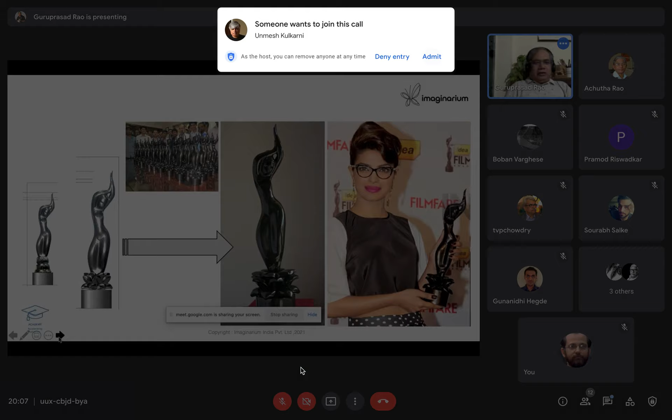That's all. And so here goes the sensational Black Lady. This we created very proudly for worldwide media and the Filmfare people. And the base of the Black Lady was redesigned to be a blossoming lotus. And you can see the lotus there. And this is a very unique piece because only the 59th Filmfare Trophy has this, and they're all very light. The year was 2013, the 59th Filmfare Trophy. And they were all made at Imaginarium by 3D printing.

And so the whole Bollywood, Hollywood, and everywhere, people were trying to consider 3D printing as a great something fallen from the sky, that kind of feeling. So it had such a sensation creation quotient once upon a time. And of course, we went to various fashion shows because fashion shows also draw a lot of crowds. We went to the first Asian 3D printing fashion show.

Can I request somebody to mute there?

Okay, it was disturbing. The first Asian 3D print fashion show that happened in Kuala Lumpur also gave an ample window to the world as to what all one can do in the world of fashion. And I designed this peacock headgear, and it was one of the few designs selected all over the world, showcased at Kuala Lumpur. And likewise, there were many.

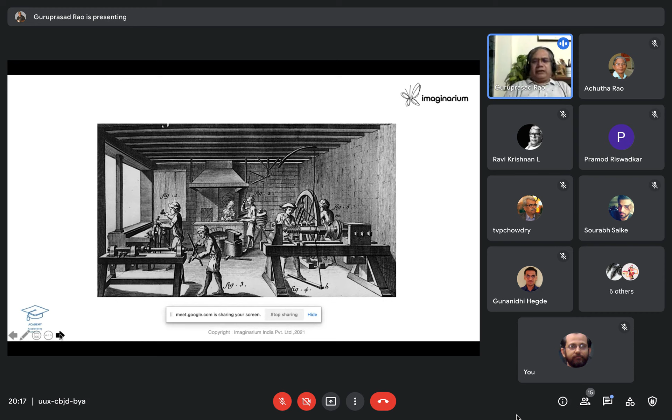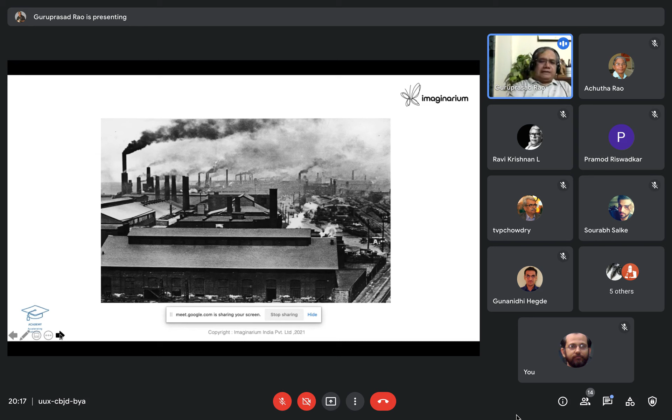But mechanization helped man to actually put a lot of energy into whatever they are doing. So mechanical advantage was actually made use of, and soon it led to steam power and all, and this, we all know, led to the industrial revolution. This is a typical industrial revolution picture. Bombay city was also looking like this, with all the mills around, and this is Ford's assembly line.

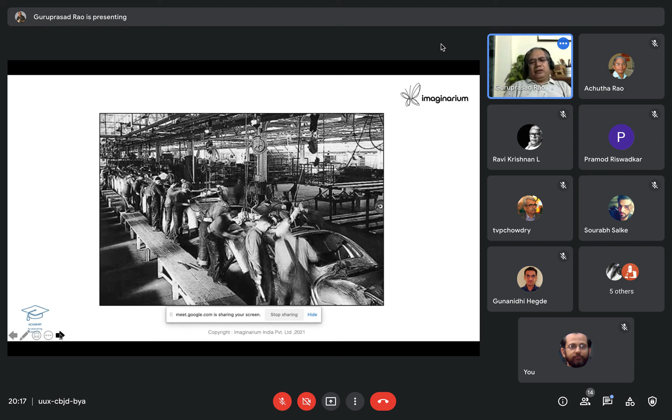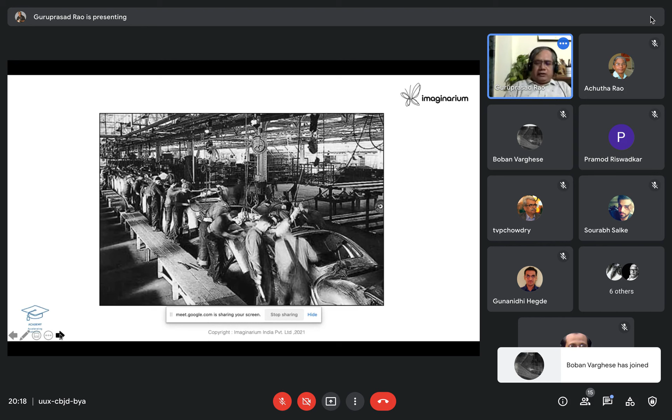This looks like a tabela, what you call a cow shed. On one side the chassis used to enter, and on the other side it used to leave, with all the things put. Division of labor, production line and all were born at that time. But soon, with the advent of radio valves and miniaturization of electronics, the whole thing changed, to have some kind of automation.

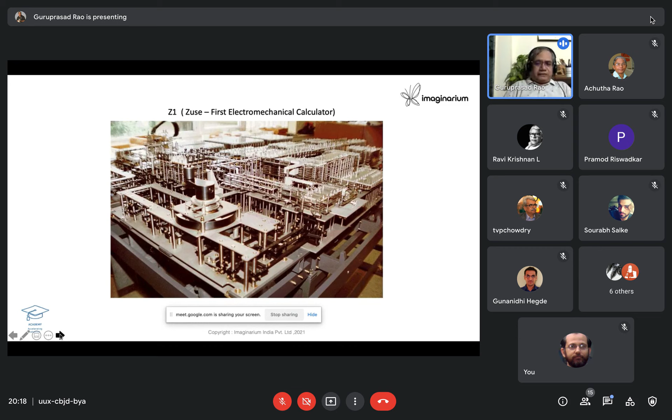So what you're seeing is the electromechanical calculator, but I think this is the last of its kind. Soon, transistors, miniaturization of electronics, all that started. The computing age started, and whatever we saw so far, we can call production technology, the art of making things. So the art of making things, in modern terms, we call production technology.

And when we speak about production technology, there are only three ways anything can be made. You can make it or break it, and put it back. They say you cut it, break it, or glue it, or something like that. So, subtractive, and joining is by gluing, or you can just transform or form it, bend it. So, formative.

In fact, today's topic, 3D printing, is a subset of one particular pillar, that is additive processes. Many people also call 3D printing additive manufacturing, though I'm not very happy with that, because manufacturing for me is a very loaded term. Manufacturing means making millions. We'll come back to that point. So if you take plus processes, casting, welding, cladding, painting, plating, gluing, lamination, coating, and 3D printing, these are all part of additive processes.

What are zero processes? You neither add nor you subtract. Bending, extrusion, drawing, forming, forging, coining, rolling, knurling, embossing. They're all zero processes or forming processes.

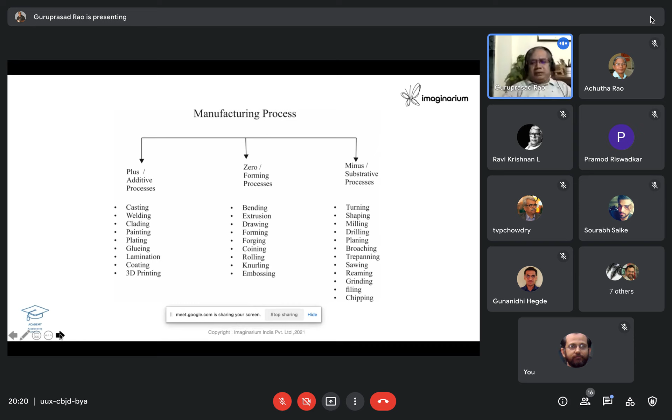Then we have subtractive processes, like turning, shaping, milling, drilling, planing, broaching, trepanning, sawing, reaming, grinding, filing, chipping, and many more. So it is like, you have a stone, you're chipping out to bring out a shape. That is all subtractive, but that is very wasteful.

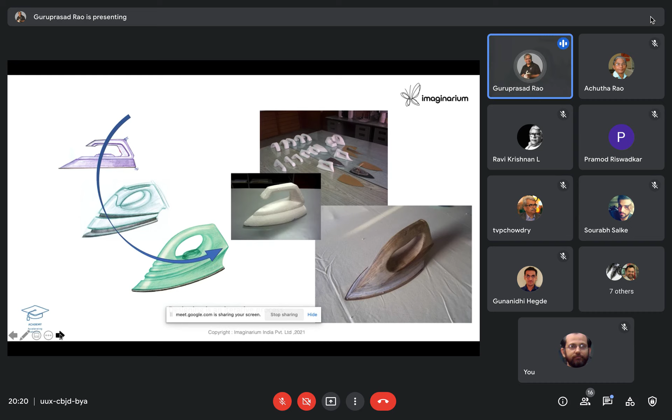We'll see how. And in fact, with all these processes, people are able to shape their ideas to make products, what we all use today. I'll not go into the details of the design process, but just to say, world over, people have been going through a systematic innovation process; recently we started calling it design thinking also.

And many times when you have an ideation and you go for detailing the nuts and bolts of design, you have to always test it. And many times we say, why does a design have to be tested? You just do it. Because there is a possibility the design may fail, correct? And so that's where prototyping becomes a very important aspect of production and design.

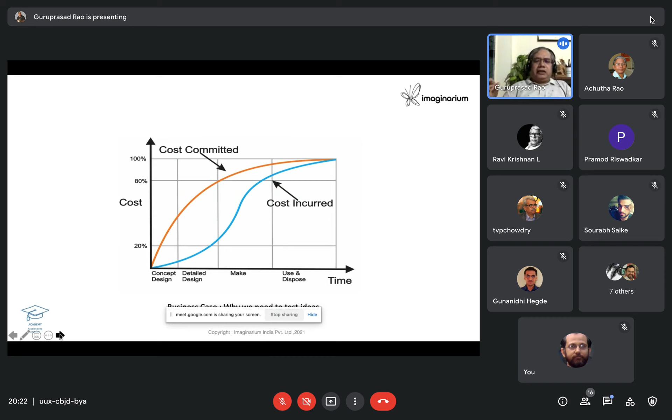And that's because there is a business case. What is the business case? The cost committed curve to cost incurred curve. In concept design and detailed design, you're not incurring as much cost as you do when you make it or use and dispose. A lot of cost is committed, but cost incurred is less during the concept and detailing stage. So people want to test here, when the cost is less, so that they can de-risk the whole process of product development. That forms the business case.

Why is that? Because if you have an idea, I can improve on it. And if I have an idea, you can improve on it. That is the beauty of the human mind. It can add and synthesize and bring out something new. So if your design fails in the marketplace, who benefits? It is the competitor. The competitor will improve upon it. So it is better to fail in your own idea kitchen, your own idea foundry, or in your own R&D.

So world over, people keep on testing and refining their ideas, and if they think at some stage it is done, they keep it as version 1, and the R&D people keep on working on it, so they get version 2, version 3, version 4. Of course, not only in India, all over the world, copyright is the right to copy. Litigation is very expensive and difficult, particularly in India. So instead of going for litigation, people should try to maintain a leadership in their design.

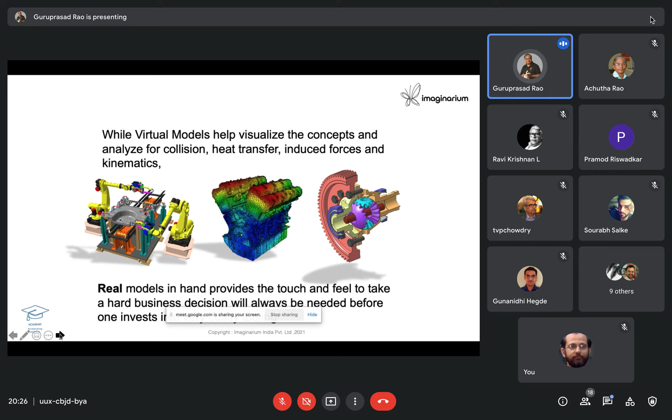So this remained, and at this point of time, people started looking at this particular aspect, how to make prototypes faster, quicker, and digitization of manufacturing was also happening very rapidly. The computer technology helped us to create all these virtual objects, and somebody was looking at it, called Chuck Hull and Dr. Kodama and various others. They were looking at how we can make a prototype quickly.

And so a new term was born. It was called rapid prototype. Rapid prototype is a word given by Dr. Kodama actually. It stayed almost till 2000, 2005. The technology was called rapid prototyping only. No other name.

And so you can see the world in the third industrial revolution, we have this 3D printing born in the year 1986. So in '83 it was invented. It took 3 years to get the patent. Charles Hull, Chuck Hull we call him, is still there as emeritus CTO of 3D Systems. And he invented the first 3D printing technology called stereolithography, or photopolymerization.

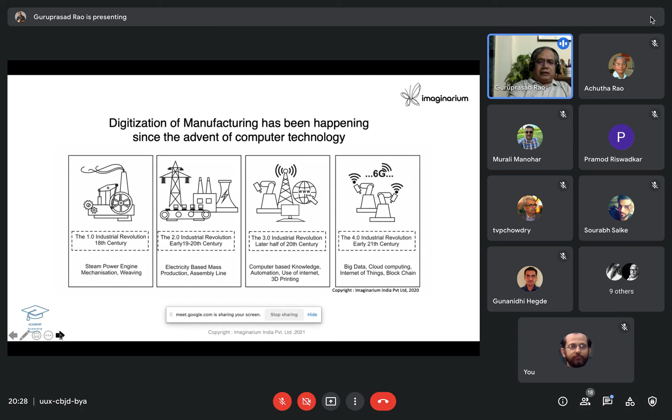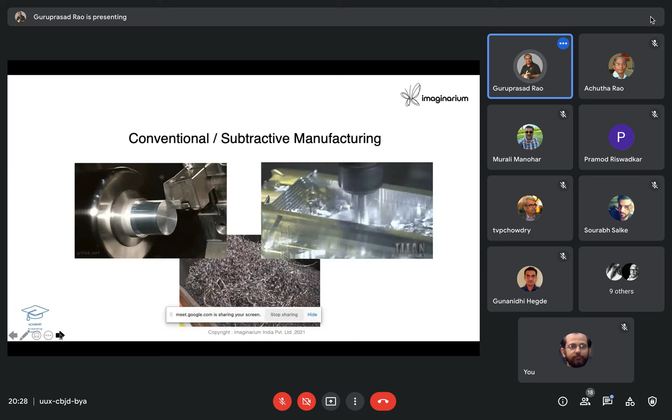And now we are actually at the cusp of the fourth industrial revolution. We call it Industry 4.0, where a lot of things are going to come and further disrupt the world of manufacturing itself. We all know conventional subtractive manufacturing is very wasteful because it generates a lot of chips you cannot eat. It requires a lot of energy. And so a new way of making things was born, and this new way is to directly create a part from the CAD. There is no intermediary.

So we are talking about a technology we can call art to part, or CAD to part, where you can get faithful reproduction of your virtual entity into a physical object which you can hold in hand and explore. In fact, this has helped a lot of new developments in product design and quicker explorations. And the cost of prototyping itself has come down largely.

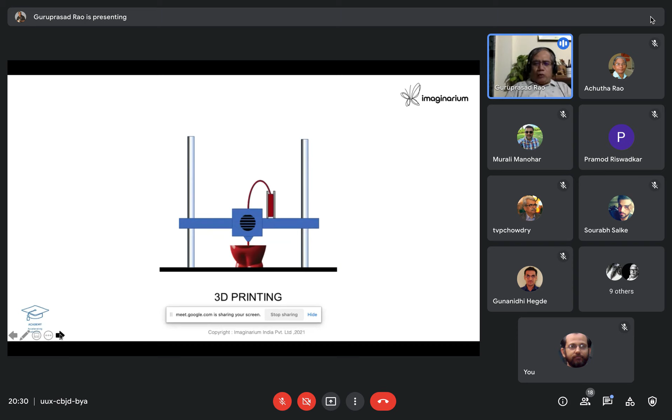If you look at the transformation here, the idea to sketch is converted to a virtual model, then it is sliced using software, and the slices are put back in a sequence in order to get the object back. In a simple way, we can say a 3D printer is a robot which will convert your virtual object into a physical entity. You can also do all these transformations.

Many times we think 3D printing is just one thing, but it is not. Many people say 3D printing uses fiber or filament. Some people say, no, I've seen some place it uses liquid. Some say they have seen another place that uses powder. They're all right, because you have various technologies today. They all do the same thing, but they're called differently. Collectively, the whole group of technologies is called 3D printing.

So you can have SLA, SLS, FDM, LOM, binder jetting, material jetting. There is one more called DED, and it goes on. In fact, ASTM had to intervene and say, don't call it by 30 different names, let us have 7. So they clustered it. So 3D printing by definition refers to a set of technologies, not one, which help to fabricate 3D objects layer upon layer from digital input data.

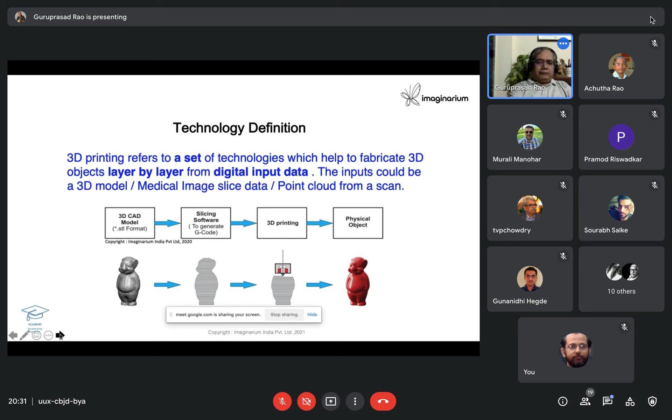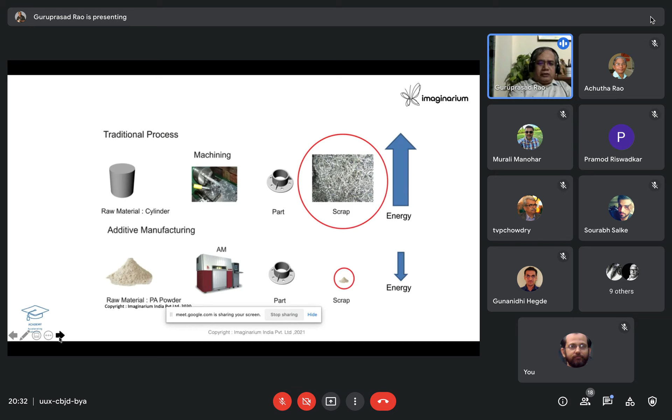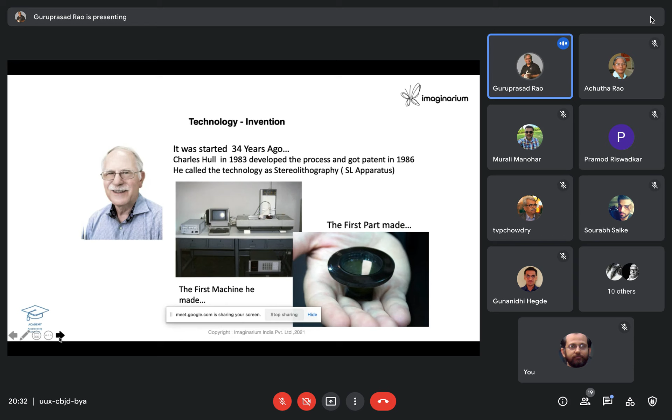And if you very closely look at the part, there could be some problems, but I'm just representatively showing it. And these are the pioneers. We talked about them. And this is the first technology, the first part made, and the humble machine which was done a long time ago, looking like that. But today, modern machines look like this.

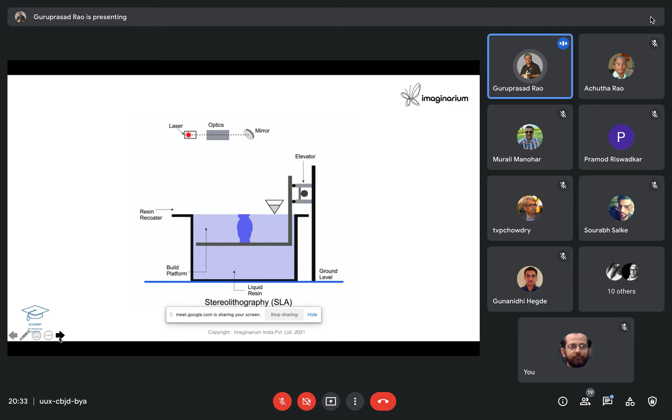So let us see a kind of animation wherein you can see the laser comes from the top. The virtual object is sliced, and every time a 2D image is done and it is scanned, and that becomes polymerized. So monomer becomes a polymer with the impingement of high energy laser, and that's how the liquid becomes a crystalline solid, and that process continues. And after the part is made, it is ejected out. And you can see how the part is getting ejected out here.

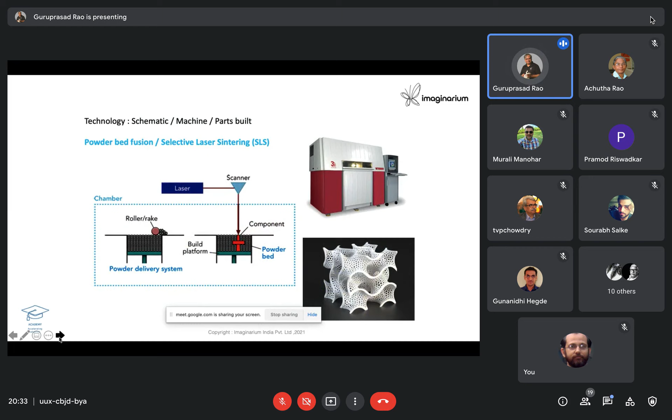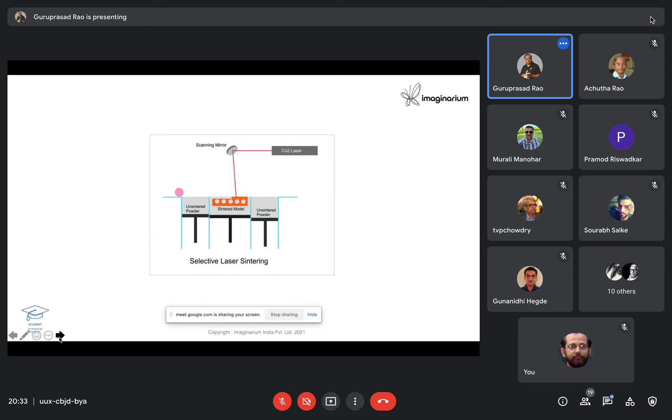And next technology is powder bed fusion or selective laser sintering. So in this also there is an animation. Maybe I'll go to the next animation. The powder is spread evenly and the laser comes, so instead of liquid, here we use powder. And you can see how the powder particles get bound to each other. This laser is a CO2 laser. It has got a Gaussian distribution of energy. That means it not only binds the two particles in the same level, but also it penetrates inside and stitches it to the layer below. And that's how the part is made.

And you can see here, this is how the machine looks like. You can see a phantom writing concentric circles on the left hand side. That is actually the CO2 laser. When it is sintered, you can see it becomes a sheet of nylon. It's a nylon powder. And the process goes on and on. You get concentric cylinders. And this is called cake. When the cake is ejected out and you are going to extricate these objects, they are like archaeological excavations. You have to take out the pieces by blowing away the extra nylon powder, so that wherever the sintering has happened, the powder are bound, and they make a solid.

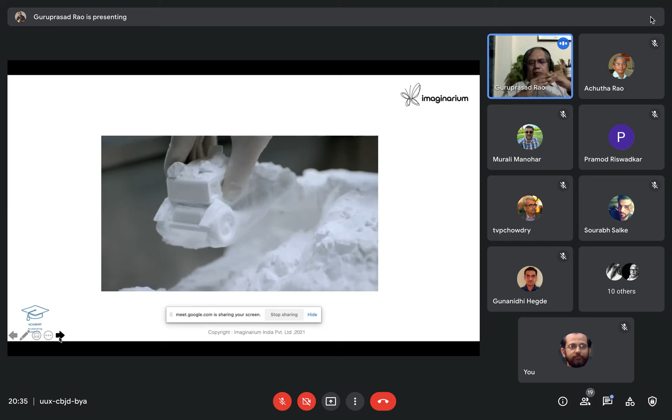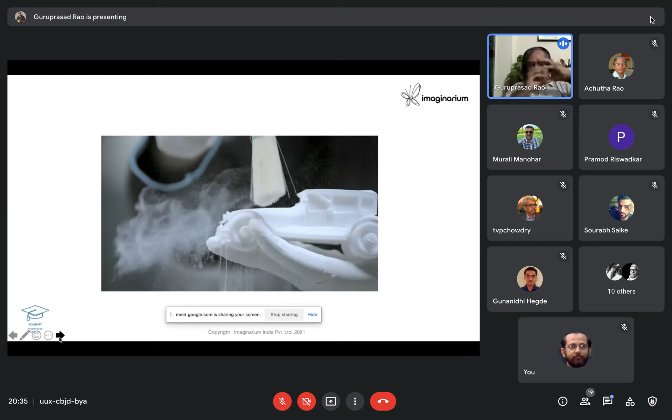And because of which, I can make chains, I can make objects that are linked together, without any difficulty. So I can actually have an assembled part. Because it's powder, after all, if I make a small clearance, I can blow it away and still get them. I keep saying one thing: in CAD, there is no gravity. So in CAD, you can keep something floating. After you fire it to 3D printing, they get assembled. So only after you take it out of this cake, the part will fall down because of gravity, and you have a link which is going to form.

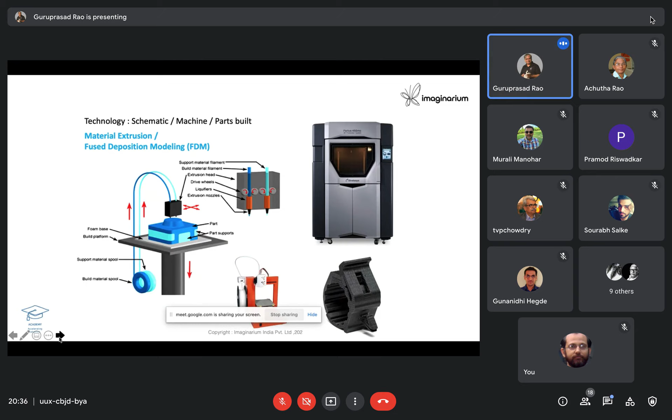And of course, you have material extrusion, fused deposition modeling, what we call. And this technology is wonderful, and in fact, it became an open source technology because of the patent expiry. And also there was a project called RepRap. We'll see that. This is a MakerBot printing something.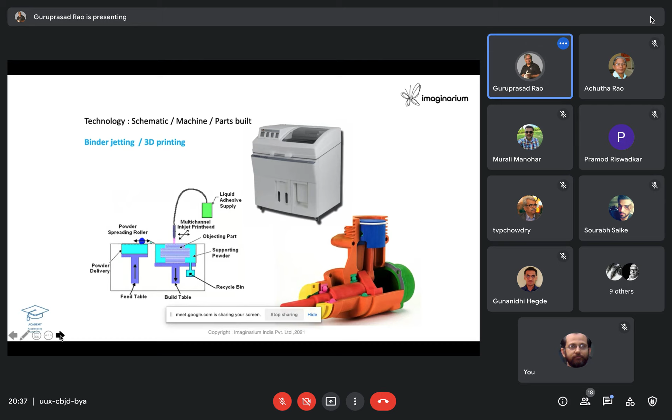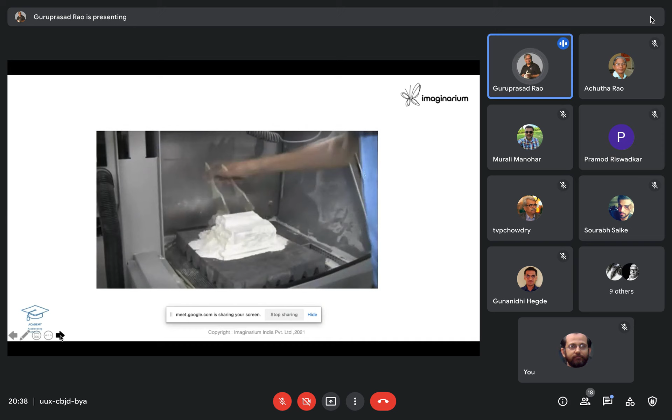And you can see a demo of this, wherein a whole home is built. When it starts, it looks like a normal house plan, and you complete the build, then vacuum all the powder out. And because it is bound by adhesive, it is not very strong. It cannot stand high temperatures. So there is no industrial application of this, and so it's not very popular.

This is an Israeli technology called material jetting, PolyJet or MultiJet, what we call. What you see here is a floating manifold, like it is in zero gravity. It has got a hard white manifold. It has got an O-ring which is very, very soft. It has got an actuator below, which is hard inside, soft outside. So the whole thing is printed together.

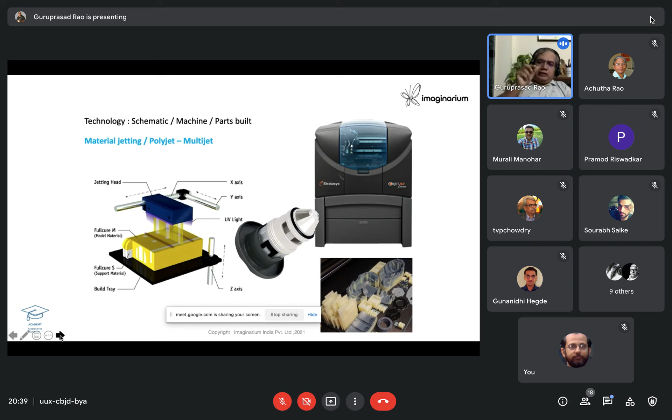How is it? Here they have a tank A and B. They mix at various proportions, at various voxel level. What is a voxel? Voxel is a 3D pixel. A 3D pixel is called a voxel, and you are able to deposit that. So you can build something from transparent to opaque, or hard to soft, or a combination of all this. So this is called a digital material, wherein they can play around with the property at the voxel level. A voxel is a very small cuboid unit one can consider.

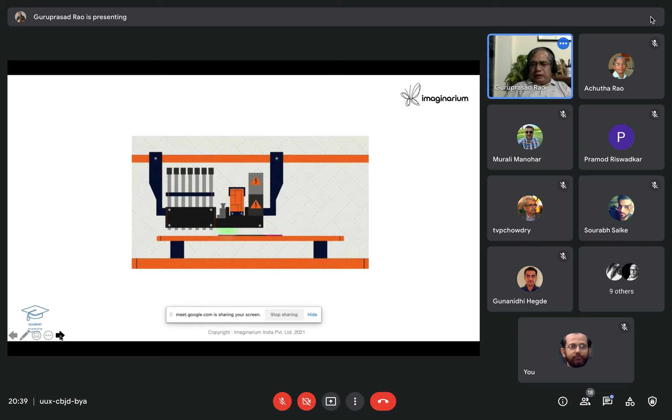And you can see here, it is like paste. When a paste is applied, what is the consistency? Soon the paste gets hardened because of the exposure to UV light. And here again, this is a photosensitive material. So it gets hardened, rock hardened, with, you can see, a green color. That is a UV light.

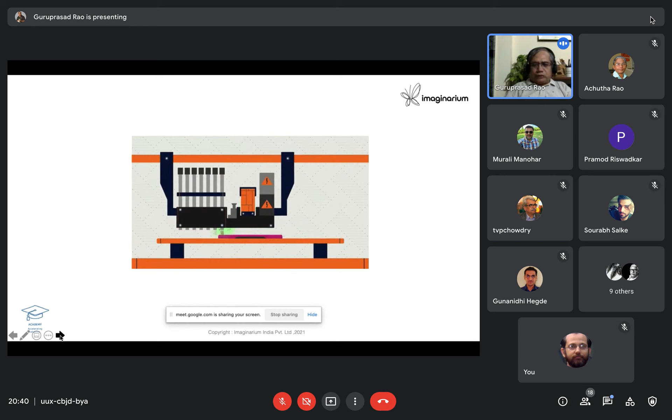And of course, people are also doing a lot of metal nowadays. Metal 3D printing actually goes back more than 100 years, they say. Why? Because they were able to use a welding torch and deposit beads of metal. And they actually demonstrated technologies to show it can make vessels or vases and things like that. That is in 1925, in the early 1900s also. People have shown. So people say metal additive is actually more than 100 years old. Well, this technology had to mature itself, and now we have a lot of such things entering the market, and they're still very expensive. We'll come to that when we take up questions and answers.

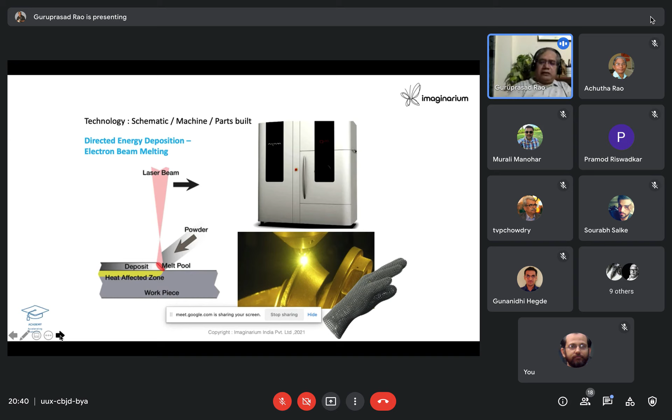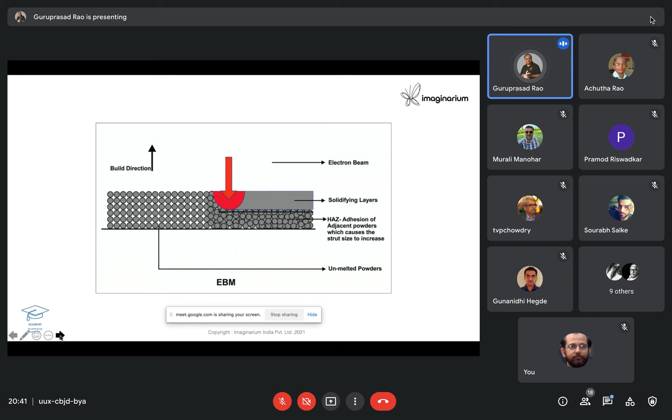And you can see here the melt pool. The metal powder, much like the nylon, also gets fused. But here actually melting happens, and ultimately the whole thing is like a foundry. It's a mini foundry. You can see how a powder bed is getting sintered. This is a powder bed. And metal being very fine powder, it can melt easily at a much lower temperature. So they are able to take it to the melting level in a very small area with lasers or plasma, or it can be done with wire and plasma also.

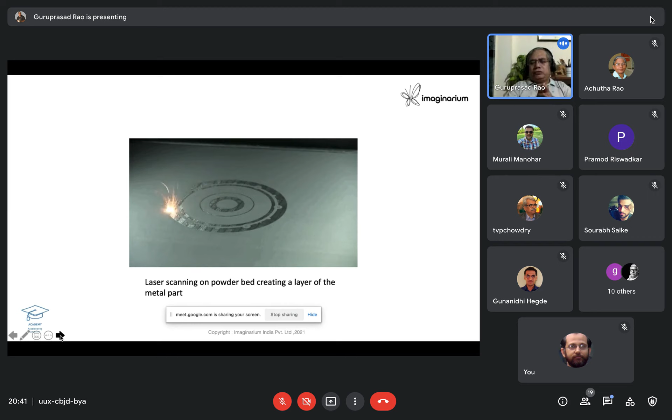So a lot of technologies are coming nowadays, and this is yet another technology wherein a wire enters in the middle. Then they're going to have a drop of metal falling. It's called drop on demand. This will transform the industrial world to adopt 3D printing, especially in metal, because every CNC can be converted into a metal-enabled machine in a short time with a small console. And also one can do hybrid manufacturing, that is, after having done the deposition they can also machine it in the same setup. So such things are also coming.

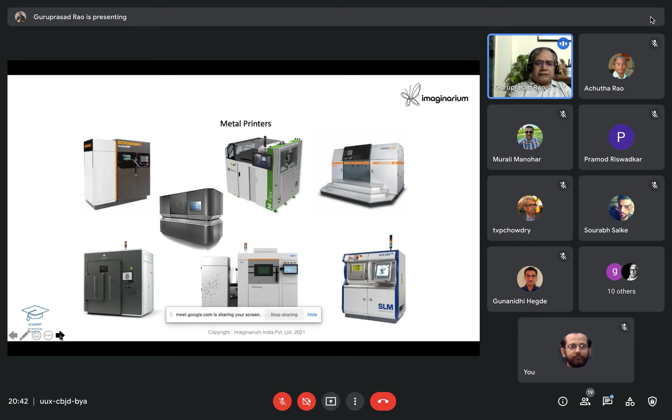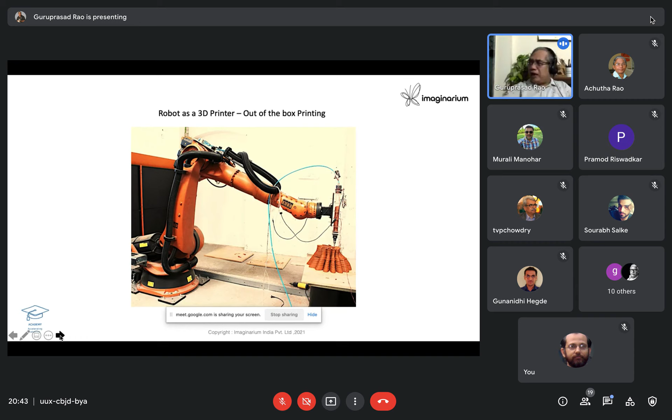So these are some of the metal printers you can see. They come in all shapes and sizes. And of course this is a KUKA robot. People have been using robots to deposit things. And many times people tell me that these cannot be called 3D printers. By definition they are 3D printers, because it doesn't matter what they deposit. In fact they can print all around. After depositing in one place they can go all around. And particularly wherever you have high demand, like food printing, such robots will do a good job.

So this is called a 3D doodler. It works on the principle of FDM, fused deposition modeling. But many times when I ask people, is it a 3D printer, the students will say, yes, this is a 3D printer, it's FDM. It looks like that, but it is not a 3D printer. Because by definition, the input has to come from digital data, not from your head. And here it is more dependent on the skill of the person, like using a glue gun or mehendi. Let us see how it works. You can see.

In fact, people have done the same thing with metal, with very low melting point metals like indium. They tried and they were actually successful. They were able to print metal also like this. Lead also can be printed, but lead is of course not good. So people are trying to use other metals. Probably I'm not able to show today, but a lot of such content is there. And you can see they are able to do it even on a different plane.

So these are the capabilities what robots can offer. In fact, robots can transform the whole 3D printing market because they have many functions to do. So I foresee that robots would soon replace the so-called boxed 3D printers.

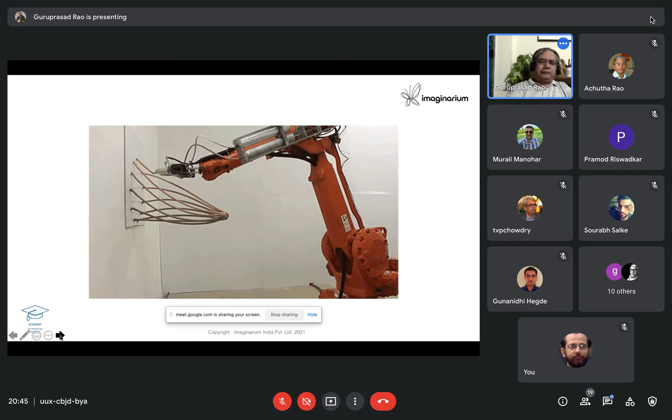So in the world, there are many things that are additive, but they are not 3D printing. For example, you have natural wood. Wood is additively made by nature. Pearl you take. Pearl is a deposition of calcium, salts and all, layer upon layer. It is again additively made.

And human beings born in 9 months, again it is additively manufactured, multi-jet, because you have a bionic camera like eyes and you have a CPU, you have whatnot, a pump and a stone like bones and soft tissue and skin which is able to sense so many things. It's full of sensors, skin is full of sensors. So that means, nature, nothing to beat nature.

But I'm going to show you something man-made actually. This is additive, but not 3D printed. और बूंदी को लगा के, with sugar syrup, you are able to bind them together, bundi ko. Then you are going to make a ball out of it, a sphere, and so it becomes a sweet. And of course, this is also another wonderful example.

The beauty of this slide is, in additive manufacturing, in a sandwich you put tomato, it becomes a tomato sandwich. You put chutney, it becomes a chutney sandwich. You put cheese, it becomes a cheese sandwich. So very clearly, if I can play around with a layer, I can bring in many things. So that is the beauty. In additive manufacturing or 3D printing, we can play around with that layer, and that is something which is missing in conventional manufacturing.

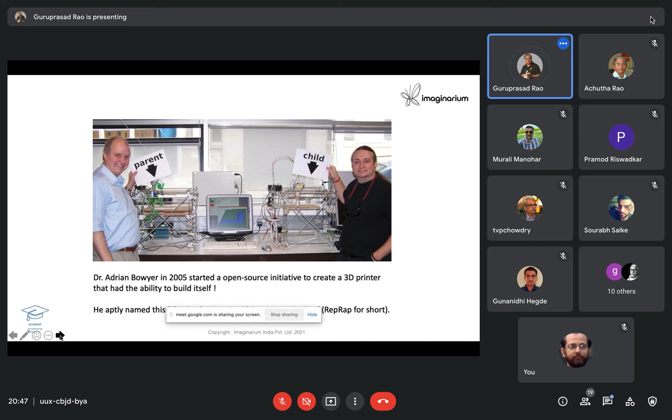And so I was talking about Dr. Adrian, who started working on this printer prints itself concept, parent and child. And in fact, people started writing such cartoons. Today, in a way, it has become true. And today, such open source have brought in a lot of things which are analogous to FDM, and they come in all shapes and sizes, and capability wise also.

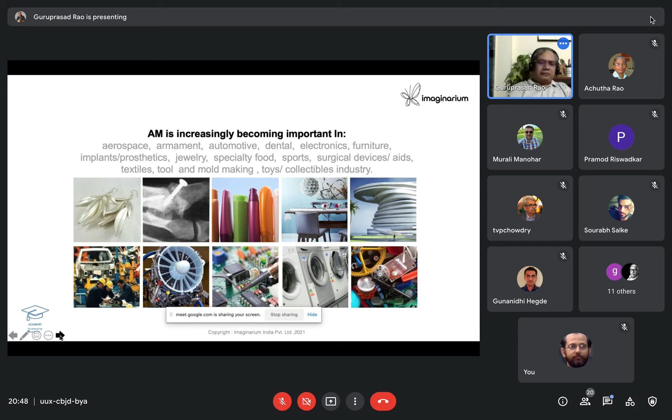And today, this additive manufacturing or 3D printing is making deep inroads into jewelry, medical, FMCG packaging, lifestyle, architecture, aerospace, automotive, electrical, electronics, white goods, plastics, and the list goes on. It is only limited by imagination. And you can see these are the objects which are unimaginable, unthinkable, unmakeable, unproducible, all kinds of fun. But it is today possible.

And how were they made? They were made by complex mathematical formulas. You start substituting n is equal to 1, n is equal to 2, n is equal to 3. And so it will transform on the screen. And when you see a very interesting object, you freeze it, export it, and then you can print it. And it can be only done by this technology, 3D printing, because it is going to give you really great dexterity in terms of making any complex thing.

It doesn't demand any additional expense or facilities or setups, which are otherwise very much required. So if I want to turn something round, I need a lathe, or I can also do it on a milling machine. But if I want to do a square, I have to mill it at 90 degrees. If I want to do a hexagon, I have to index it. All those things are not required. So in conventional manufacturing, you need so many setups. You need jigs and fixtures. Here, nothing is required. That is the beauty of it.

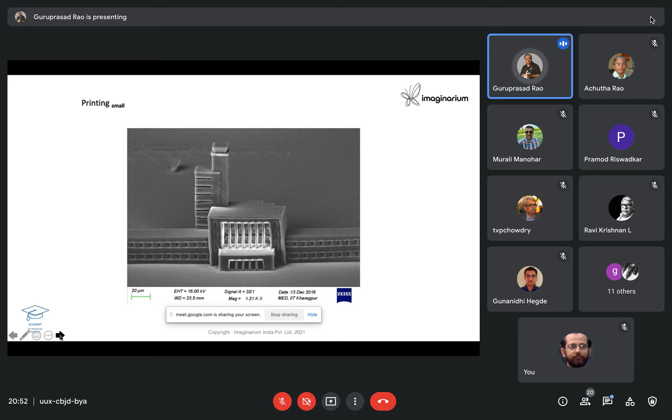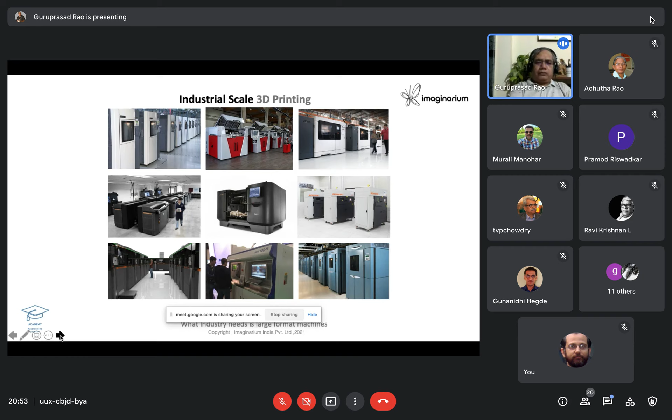And in fact, when we speak of 3D printing, there is no economy of scale. That means if I make 100 or I make 1,000, the prices will not so much fall. No economy of scale. Conventionally, if you make 1,000,000, the landed cost of the part will become very, very less. That is the beauty of mass manufacturing.

But today, we hear more and more of mass customization, and it is a misnomer. Mass customization has a real value add, and it is available at a mass price. That means it is low cost. At the same time, it is customizable. That's called mass customization. Anyway, today we'll not go deep into this. That is a big world by itself.

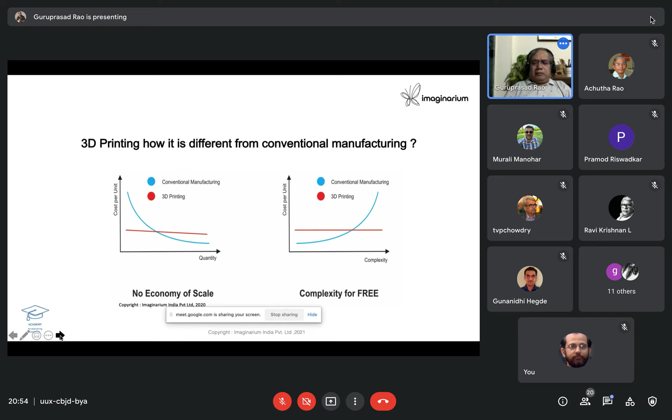And complexity, when it comes to conventional manufacturing, complexity will add to cost. Whereas in 3D printing, no matter what you are going to do, a cylinder or a very complex Ganesha, complexity-wise, the machine doesn't discriminate. And you can see where exactly 3D printing today can be used. Whenever you have complexity and very low volume, 3D printing is best.

Even today, when you need large numbers, then you need to go for all those design for manufacturing, design for assembly, design for that, design for this. But 3D printing, when we say it gives you extreme design freedom, cannot do a high volume even today. But somewhere we are going near that in a very, very slow way. That's why it is not a revolution.

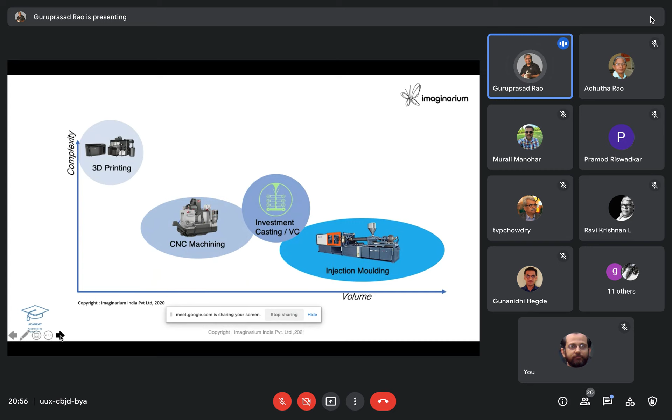People have not adopted 3D printing like the smartphone, for example. In the last 5 years, people never really thought that every one of them would be using a smartphone, right? With all the color display, and we had the luxury of the gyros and so many things. But today, 3D printing is 35 years old. Next big thing, people say even today, but this has been there for 35 years. So it's a revolutionary technology, but it is showing evolutionary growth, right?

And so we can see the growth. What started in '86, which was capable of only making prototype, mock-up model, dumb model, became more accurate, so you could do design validation. And then today, we are somewhere close to making end user parts. Why I say somewhere near is because the real world still needs real hard material. In the use context, you require a lot of high temperature, high toughness material, and so many materials which are not possible by additive manufacturing, largely because of the R&D also.

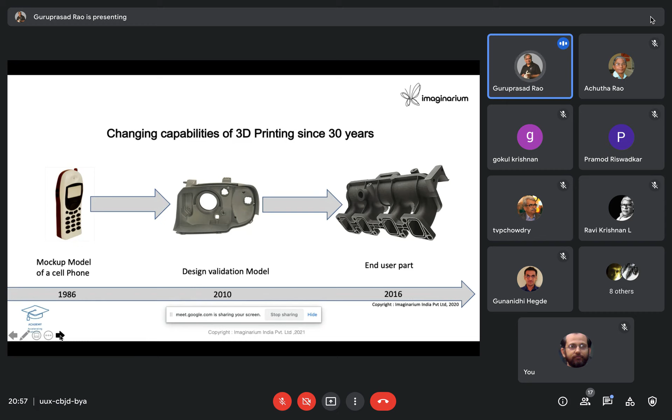Material R&D for additive started much later because people were still toying with whether it works or not. But today, I think there's a good roadmap, and a lot of companies are funding material research, and that is the way it goes. Hardware may get saturated, but the material development side and the software development side will really make this technology kind of child's play. That is the beauty of technology.

And the future of 3D printing is moving beyond prototyping to end user parts. And of course, material: there are a lot of materials, polymers, metals, and others is a big one. It can be even medicine, it can be glass, it can be diamond, it can be anything, gold. And the material input will be in various forms: liquid, sheets, filaments, or powder.

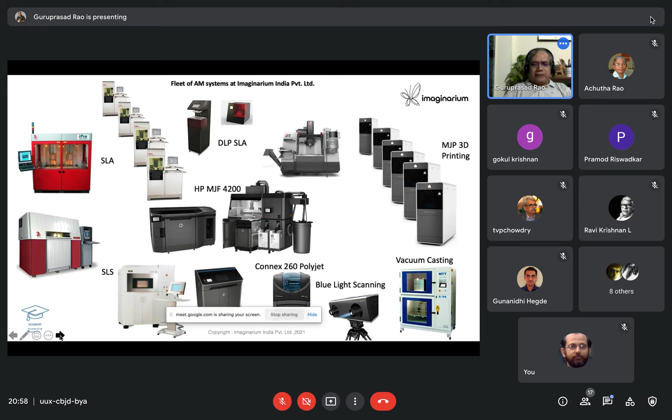And if you see the technology, a whole lot of them, you have small, big, and you also have bioprinting. Bioprinting has been a great interest in all the universities now, including IIT Bombay, IISc, IIT Hyderabad, world over. People are trying to do biofabrication, organ printing, organ fabrication, so many things. People want to print food, meat getting printed, and things like that. And we'll come to that.

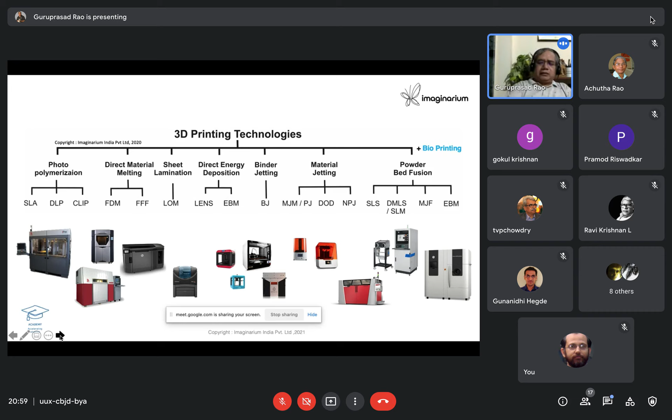And in fact, prototypes, for which the whole technology, 3D printing or rapid prototyping, was born. Even today, 70% of 3D printing is used for prototyping and development. Maybe of this, there could be 50% for production, 50% for product development and research also. What I'm trying to say is this virtue, this capability the technology has, is still being used today.

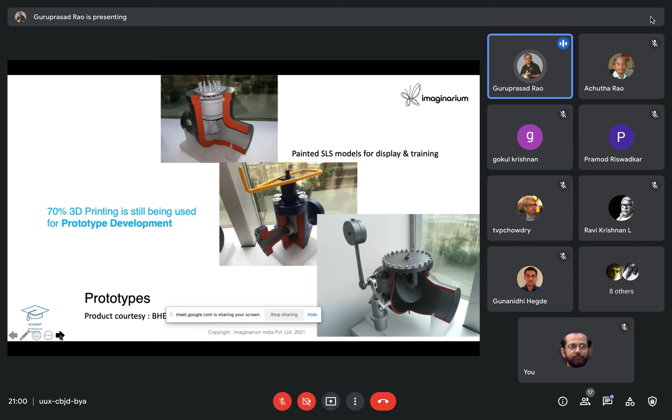So scale models people are trying to do. People are also doing full scale models. So this we did for Vazirani, Chunky Vazirani, and this is India's first electric hypercar. So many parts are all 3D printed. They are putting together all this. This is a dummy model. It is not a real running car.

It went to UK and came back for a show, and it is somewhere in Andheri West. It is now being developed. They are developing the interior now, and also they are looking for funding. And so a whole lot of stuff can be made by 3D printing. In the early days, all this FMCG packaging, automotive things, mirror optics, were all being done to simulate. I remember in Auto Expo, many of these things were all made by additive manufacturing.

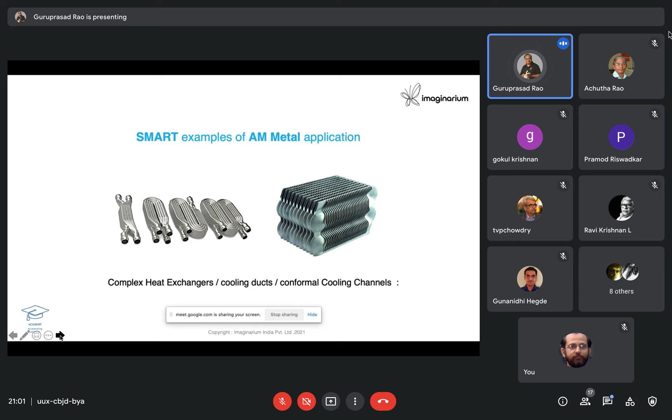They look like real, and some of them work like real with all the capability, but they are 3D printed. In fact, in metal, it is very expensive, but one can derive maximum benefit in heat exchangers, where it's the surface property, exchange of heat and mass flow, and so many times people use additive manufacturing for that. That's the best actually what you can think of.

And in fact, jewelry hitherto was considered to be a piece of gold. Now it is no more. One can actually freak out with designs, have anything, and get it printed, enjoy. It need not be gold always. And so it is actually defining a new aesthetics.

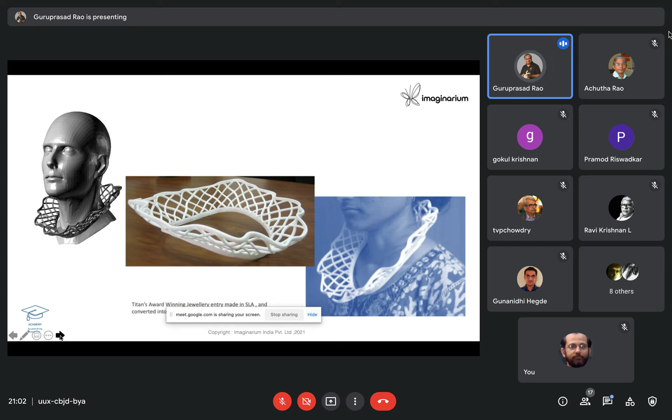So Titan, in the early days, wanted this to be done for a fashion show, and they wanted a flexible material. Those days, the flexibility was not there. So we made a master, we had a silicone mold and injected a flexible material, elastomer, to make this. So there's a lot of jewelry we made. So you can see the new aesthetics taking advantage of what can be made. So people have been toying with this and it adds value.

So the lightweighting, besides aerospace and automotive components, in jewelry also, people like these Voronoi diagrams or network structures on the surface. So it retains the shape, at the same time it reduces weight. People want to show more gold, but they don't want to pay for it because it's very expensive. So people love this kind of thing. It can also make it breathable. It doesn't trouble. You can see here some of these.

So people have been trying to do many things. Customized phone cases and all. Somebody thought it is going to be a big business, but soon, it's like a child toying with something, and after that it'll break the toy and start making new things out of the broken toy. Same thing happens with all of us.

So people had a fancy for all this, but one can want to do such things on demand, and you can see these are some of the capabilities we have, and really making these parts which will bring in evaluation of ergonomics, aesthetics, finish, all that quickly when you are doing your product development.

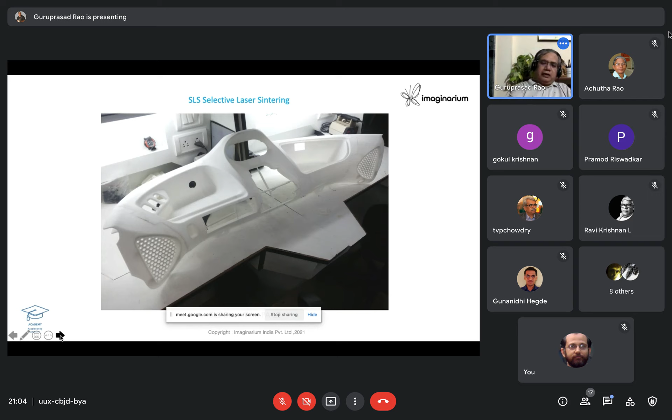So at a fraction of the cost, you can cut down on time and get all these things done. And many times clients will approve of this more readily because they're able to see it. So there is a quick buy-in from the client or your design department or marketing department, whoever is the funding authority, VCs, for example, for the startups.

And in medical, typically there are 6 levels. The first level is devices. The second level is making models, big or small or 1:1. The third level is making jigs and fixtures for surgery, stents, dentistry, all that. The fourth level is making an implant which is going to be inside your body for your entire life and beyond. Then you have drugs.

Children want to consume a pill, a medicine, like jujubes or a flower or smiley, those things. And people who use multiple drugs can probably put all of them together and make one pill instead of taking 10, 15 pills. So that is also being looked at, if we can do it. So still there are a lot of challenges here.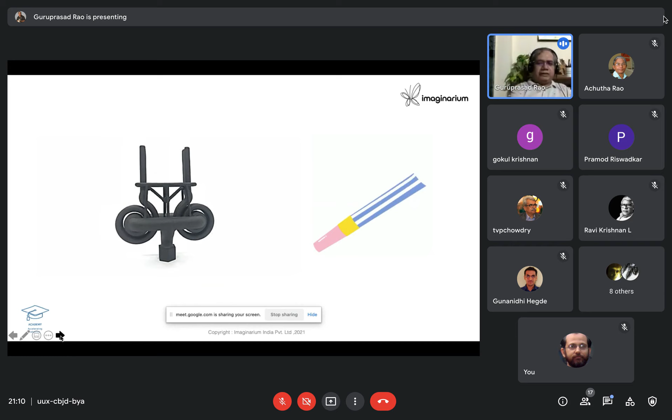And you may wonder, what is this? It looks very funny. In fact, you can see on the left-hand side, there is a spiral there. And with the spiral, if we have compressed air coming into the center, these two will become bigger. And the center part is like a tongue. They come closer. So let us see an animation. You can see here how this tongue is working.

This is called a compliant mechanism. Compliant mechanisms are mechanisms which have no moving parts, though they move and actuate. The bill of materials will be just one, no springs, no joints, and that's the beauty of the compliant mechanism. And they have a very long life because there is no wearing material.

You can see the customization is going to reach the end user. So much so that a common product like a razor is being tried out with such an offer where the end user can play with it. They can order anything, and whenever they order like this, they're ready to pay more. They're also ready to wait for some time because it is customized. So with this, only 3D printing can answer such agility.

When we look at the line system, it is made for a particular assembly line, so it becomes very difficult. So the promise of just in time, what the Japanese promised, is probably happening now because of 3D printing. So the future is all about building the world smartly through reliable technology, acceptable quality, with a lot of material research we need for the real world. And all these things can be controlled from a distance.

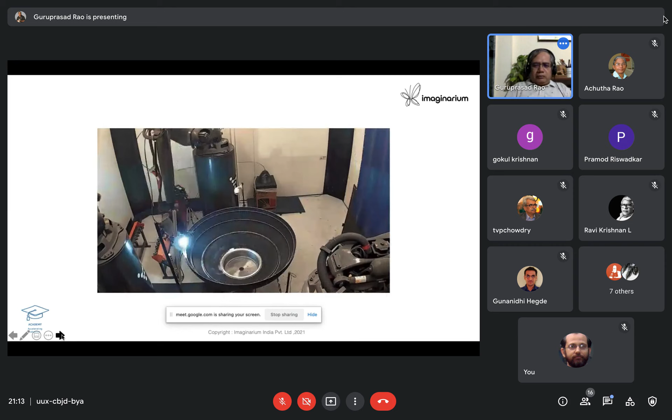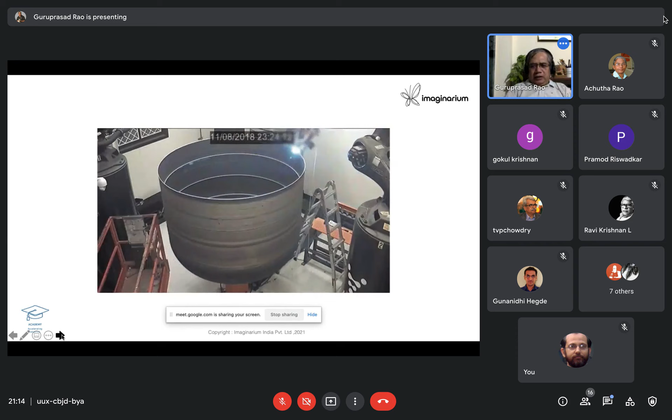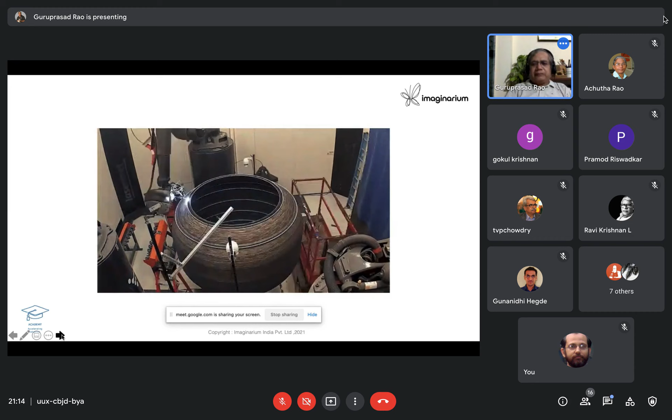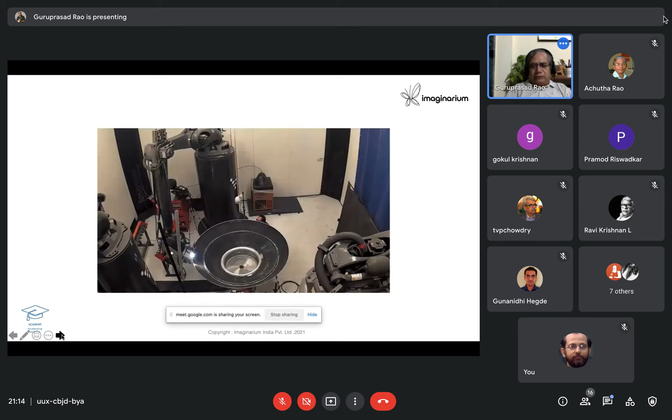That's what happens. And you can see 3D printing is going to soon go out of the boxes. In fact, they move, and they are going to be in a room like what we all live in, without the need for a special atmosphere or special environment. And these robots can transform and build all such big things. This is from Relativity, a competitor to SpaceX, and they are building a lot of rocket fuel tanks by this metal wire based, welding type of 3D printer. So it's a wire based one, so it's much cheaper compared to powder based metal 3D printing.

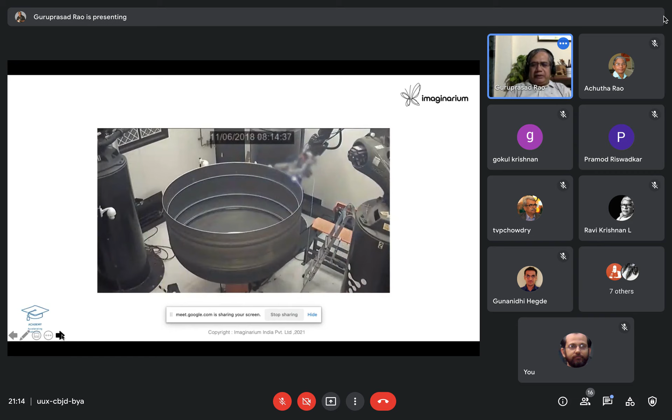And I think with this, we come almost to the end of the presentation. When we talk of 3D printing, we sometimes forget a lot of other stuff which is important even before we reach 3D printing. That is the idea or design. What is the need you want to address? Then, of course, there is the design part. Then you do the CAD embodiment design. Then of course reverse engineering can be used, AM can be used. Then you always require pre-processing of files before it can go to the 3D printer.

The 3D printer itself needs material on one side. It also requires a lot of machine care, and that is also very specialized. And this doesn't end. You need to have post-processing. Almost everything which is 3D printed has to be processed in order to use it in this world. Then, of course, it opens up a world of opportunity, which we have seen now. In some sense, we started with a sensation, a fashion show, and we saw a lot of use cases where industry is using it in making products, devices, even medical devices, which are very useful.